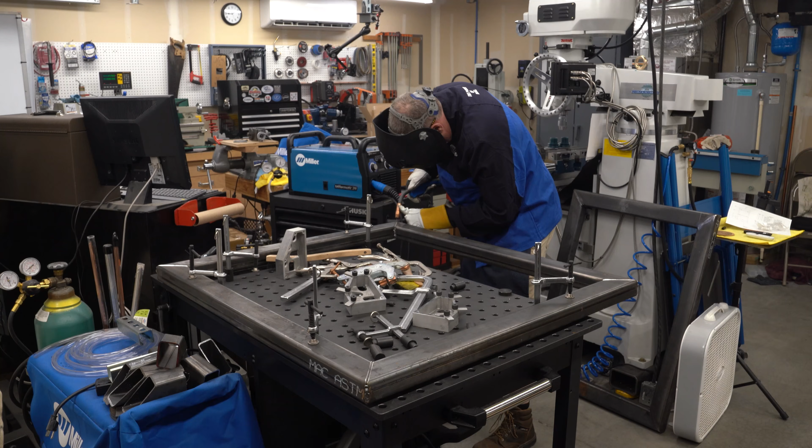Today we're doing everybody's favorite pastime, watching someone weld on the internet and telling them everything they did wrong. Though in my case, the criticism is well deserved.

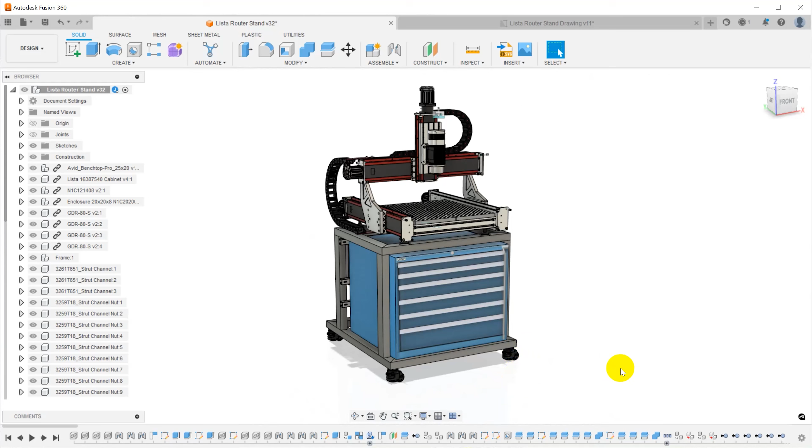This is the design for the router stand that I think I showed in a video almost a year ago, and the reason for that delay is this lista cabinet that is built into it. I ordered this from MSC and they quoted me 3 weeks lead time. 3 weeks became 6 months. One thing led to another, and here we are almost a year later, but we are back on the project

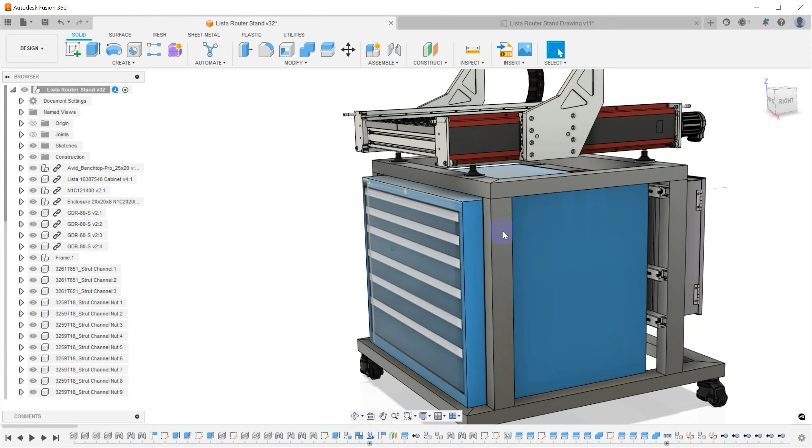today. This cabinet is a full depth lista cabinet, and it should provide plenty of storage for tooling and fixtures and anything else that I need for the router.

And then it's wrapped in a framework made from 2 by 3 inch rectangular steel tube. I'm using 1/8 inch wall tube just because it's easier to weld than the thinner wall stuff, though thinner tube would probably be sufficient. The extra weight will probably help with vibration though.

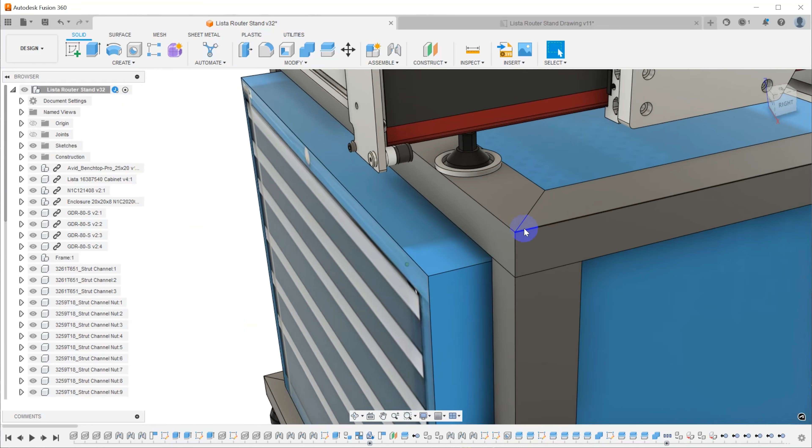I've got some rings that I'll weld onto the top here, and this will just keep the feet of the router from walking around so that it doesn't vibrate and find its way onto the floor.

And then on the bottom, I've got a set of 4 FootMaster casters. These are rated at 500 pounds per corner, and they have a ratcheting mechanism that lowers a solid rubber foot that will lift the whole thing off the ground for stability, or it can be raised up so that it

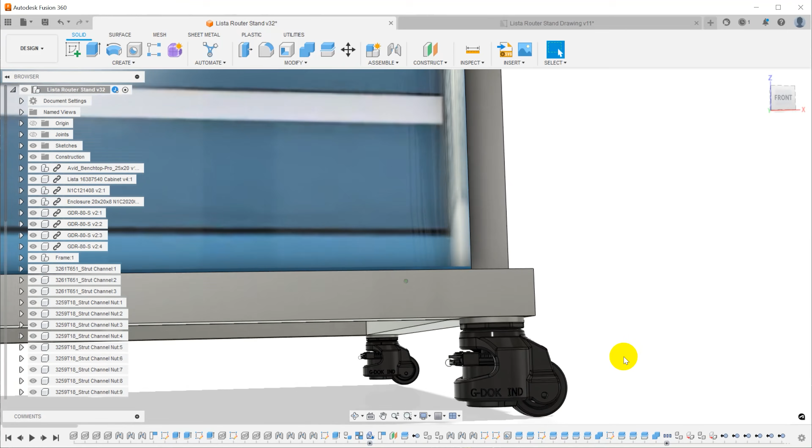can be wheeled around. And then on the back, I've got 3 pieces of strut that will allow me to attach the cabinet just so that it can't shift around and give me a place to mount the electronics boxes.

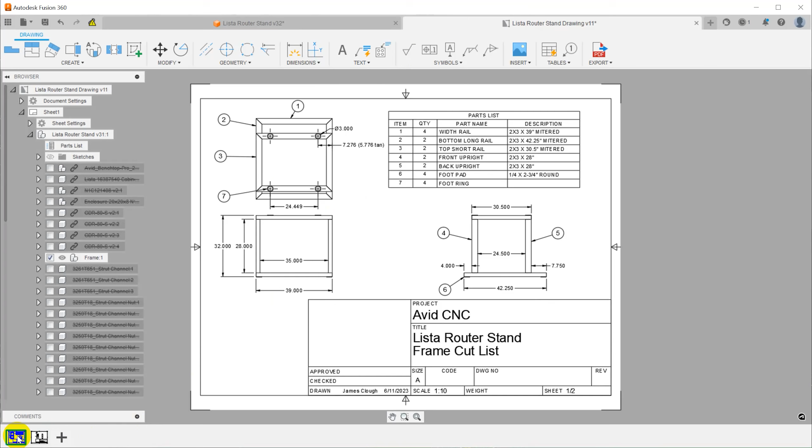But this will just give me the dimensions I need with a tape measure while I'm welding it up so I can locate the parts, and then a drilling plan for where the holes need to go to mount the strut on the back. So I think all we need to do now is go out to the shop and start cutting the tubing. This thing's not going to make itself.

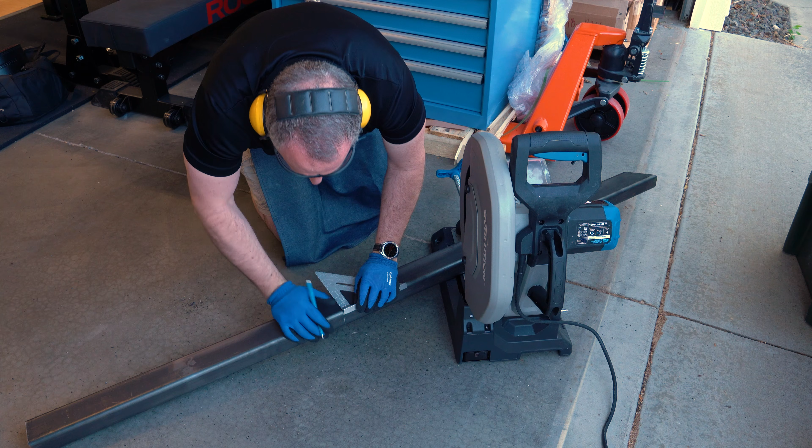To cut the tubing, I am using my Evolution Carbide cold saw, and this thing makes short work of a project like this. It cuts through this tubing really quickly and leaves a nice clean cut. I really like the cuts that it makes, but it really makes a mess.

In a previous video, I attempted to make a vacuum port for this that would catch a lot of those chips, and it caught maybe 60% of them, but it still makes a huge mess, as you can see. So I've just gone back to working with it down here on the floor. I might take another run at that someday, but for now, this is a pretty good solution. The chips don't go very far when they start this close to the floor.

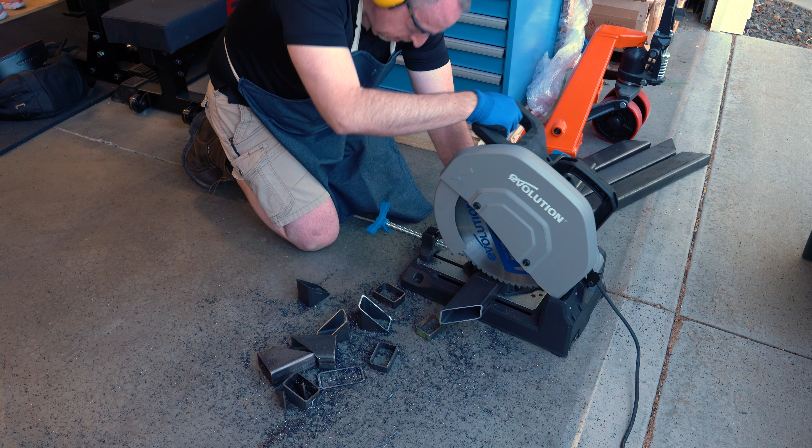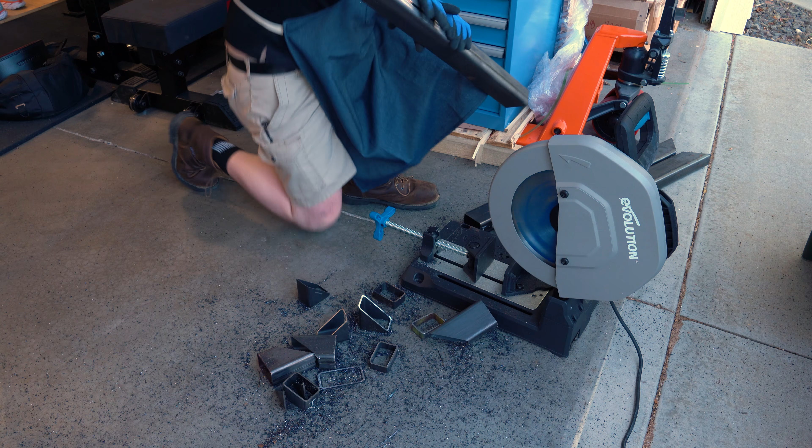The saw does have a miter fence, so I can just swing it out to 45 degrees, drop in the pin, make the cuts, move it back to 90 degrees and make my 90-degree cuts, and it makes a project like this a lot easier. I could set this stuff up on the bandsaw, but my bandsaw doesn't have a positive stop at 45 degrees and it would take a lot longer to make the cuts, so I just live with the mess.

The FootMaster casters mount to the bottom of the frame using a 1/2 inch threaded stud, and I didn't really think the 1/8 inch thick wall of the tubing was really going to be enough to retain that. So I'm cutting out some discs made out of 1/4 inch steel plate, and I'll thread those and weld them onto the bottom, and those threads should hold securely.

I'm also cutting out the rings that I need to secure the feet of the router to the top of the stand. I could have made those with a ring roller, I do have one, could roll those out of straight stock, but that seemed like an awful lot of work. As long as I have the electric fire machine out, I might as well just burn them out of the plate. I can also pull this out later and make any other brackets, weldments, or reinforcing gussets that I need for this project.

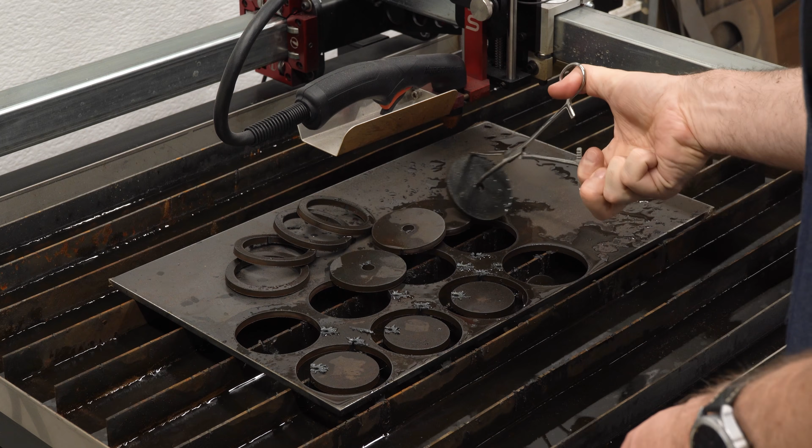The plasma cutter leaves a little bit of dross on the parts, but that is easily removed with a 60 grit ceramic belt in the belt grinder. I used to do this job with a right angle die grinder and Roloc sanding discs, but that's way more work than this, and the belt grinder ends up being a lot easier to control.

I found that if you just hold the flat side of the part with the dross against the belt and roll it back and forth on the tool rest, the sparking will die down once the dross is gone and the belt doesn't appreciably cut the surface. Then a nice quick swipe around the edge squares it up and leaves a nice clean surface for welding. Just like that, we've got 4 rings and 4 pads.

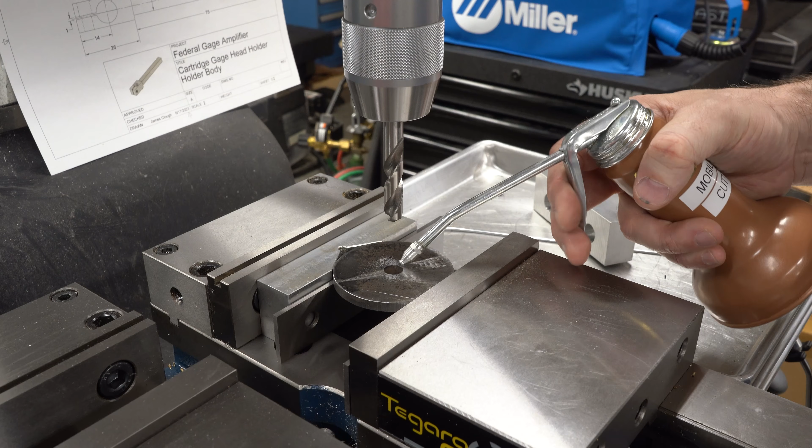Let's go cut some threads. I probably could just thread the holes in these plates directly, but the plasma cutter does leave a little bit of a taper on the wall, so I thought it would be better to come back and clean it up with a drill first, just to make sure there weren't any tight spots and I didn't end up jamming or breaking a tap. I was a little bit worried the drill would get hung up in some hard spots from the plasma cutting, but that didn't happen at all. It just cut right through it like butter.

With all the holes drilled, I just came back with a 1/2-13 tap, that's the thread that's on the FootMaster casters, and just power tapped them. That went right through like nothing too. I was again concerned there might be some hardness there from the plasma cutting, but it just didn't end up being a problem.

The easiest way to drill the holes in the back uprights is here at the mill. I have a stop here bolted to the mill table, so I can take each of the back legs, slide it down against the stop, clamp it in the dual vices, and use the DRO to locate the holes.

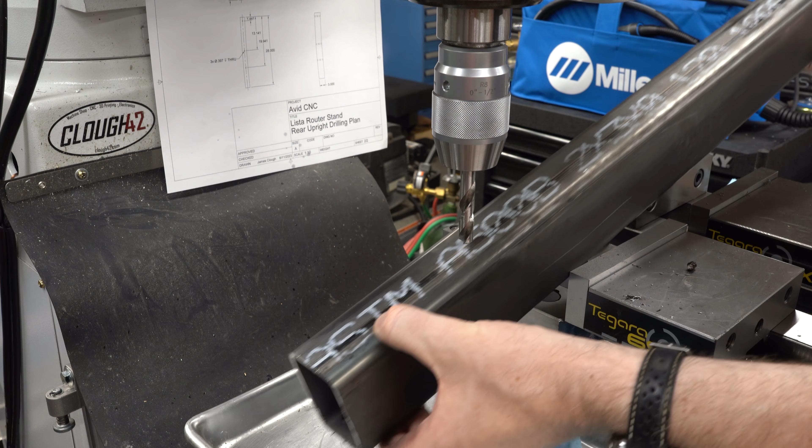I'm drilling these out as clearance holes for 3/8, that's the size of hardware I'm going to use to mount the struts to the back of the stand. So I can just drill the 3 holes in one side, clean it up, then flip the part over in the vices and drill the matching 3 holes on the other side. The stop ensures perfect registration between the 2 sides.

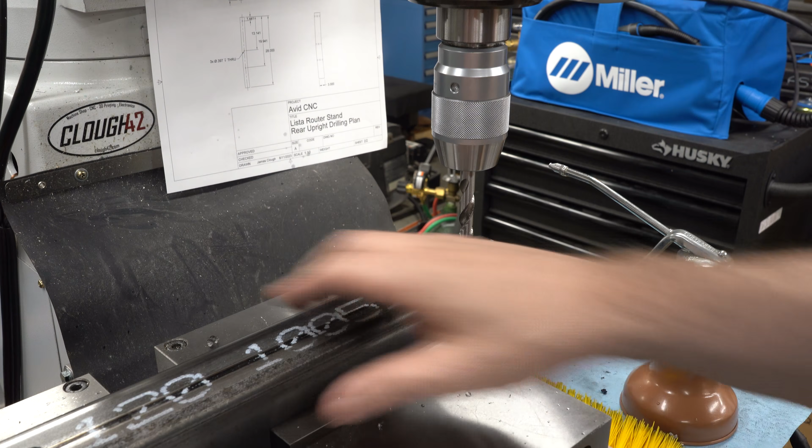Once this is done, I can put the other piece in and drill the 3 holes in each side of it. This is far easier than trying to do this with a hand drill after the frame's welded together.

Since all the parts are still loose, I might as well grind the weld bevels here on the belt grinder. I'll start by cleaning up any little burrs left on the end from the saw process, then work on the outside corner first. There's a sharp corner here, and I'm just going to grind it down flat at a 90-degree angle, and this will leave a 90-degree V on the outside corner for the weld.

Then I'll just put 45-degree weld prep on each side of the miter. This will make it possible to sink the weld all the way through and get full penetration, and also not build up too much material on the surface that I'll just have to grind off.

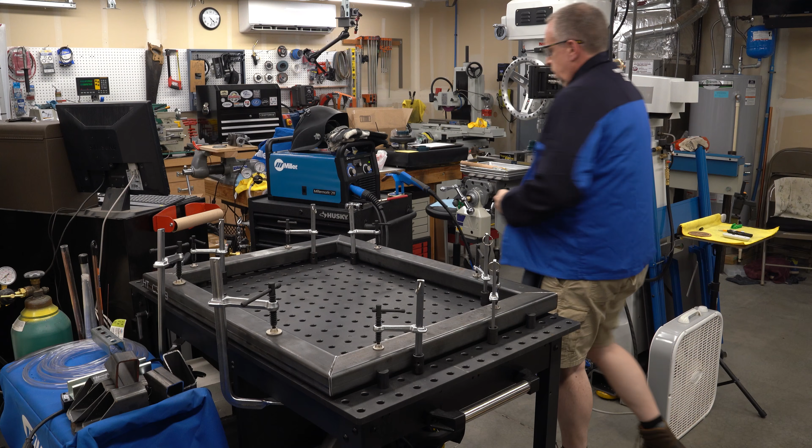This is the kind of project where a welding fixture table really shines. I have the part sitting up on top of 1/2-inch spacers just so I don't have to weld right down next to the table surface, and then I'm using pins in the table to make sure that the frame is square, or at least that one corner is square, and then I'm checking the outside dimensions to make sure that I have all of the miters butted up against each other consistently.

Ideally, I would have left a 1/16 of an inch gap, but I didn't think about that, so they are butted tight together, and the whole frame is about a 1/16 of an inch oversize, which will be fine, but it would have been better to leave a gap.

Now I'm starting the tacking with the outside corners, and I'm doing adjacent corners back to back, because the tacks on adjacent corners will tend to pull the frame out of square in opposite directions. So by working my way around in that pattern, the tacks will tend to all pull against each other and the frame will stay as square as possible.

Now with everything tacked, I'll start by welding the outside corners. I'll do this with short stitch welds or just try to be very careful with the movement. It's pretty easy to blow through on this kind of a weld, so it does take some care. And I'm doing the same thing, doing adjacent corners back to back to try to equalize the stresses. And then I'll weld the inside using the same pattern.

I did do some practice welds before I started on this just to try to get my hand in and make sure that I wasn't going to screw this up, and I got impatient with that and decided to just jump into the project. I mean, what better way to learn than to do? And it turned out okay.

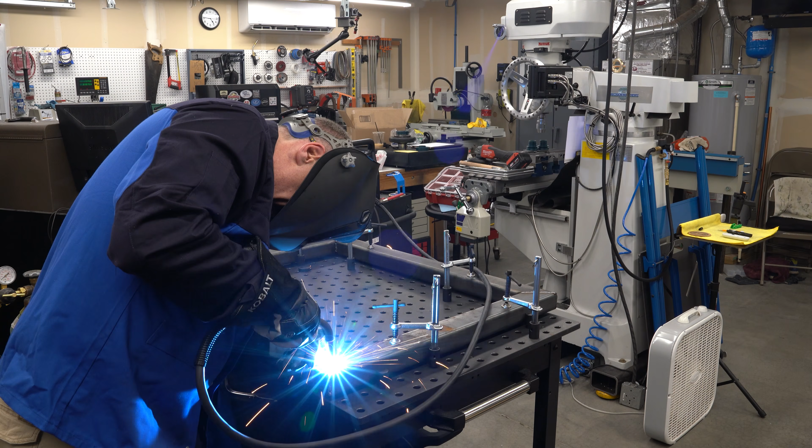My travel speed on this first frame was a little bit fast, so there are some gaps in the welds where I didn't fully fill the weld bevel, but I learned something and I'll do better on the next one.

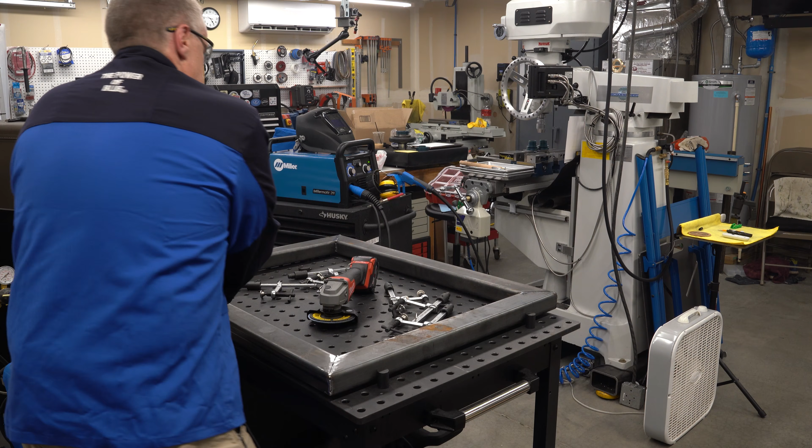Now with everything welded and unclamped, how flat is it? It's pretty flat. I'm impressed. This fixture table and the weld pattern I used did a good job.

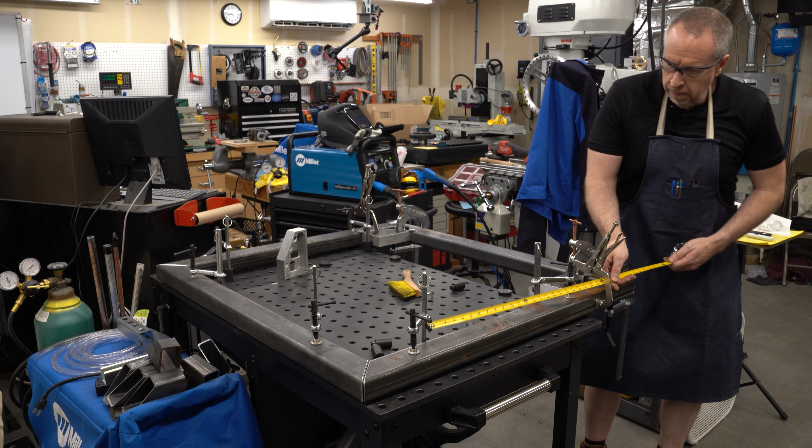Now for the second frame, it's a little too big to fit fully on the table, so I'm using a pair of Fireball Tool aluminum minion squares with the little alignment tabs, and this worked well. So I've got 3 of the sticks actually clamped to the table and the other one out in space with the minion squares, and it worked just fine. I wouldn't want to do something too much bigger than this, but at this size, it worked okay.

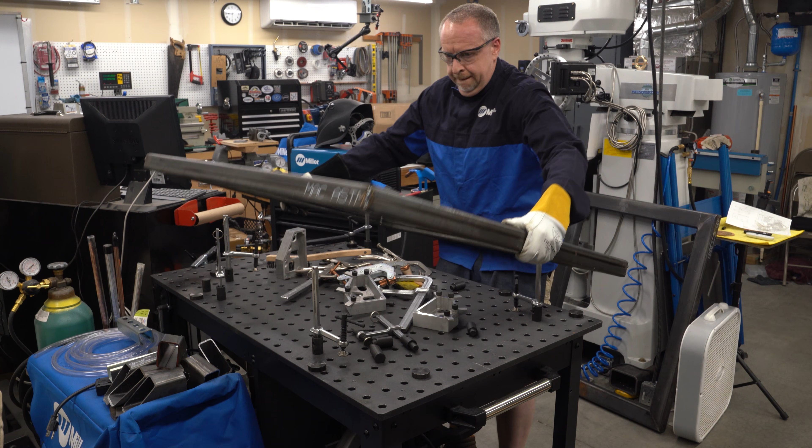All the steps for welding this out, grinding flush, flipping it over, and welding the other side are exactly the same as what you've already seen. You can see the round spacers there on the table that I'm using. And again, that's just to keep the welds up above the table to reduce the spatter that sticks to the table, but also just to avoid accidentally welding something to the table.

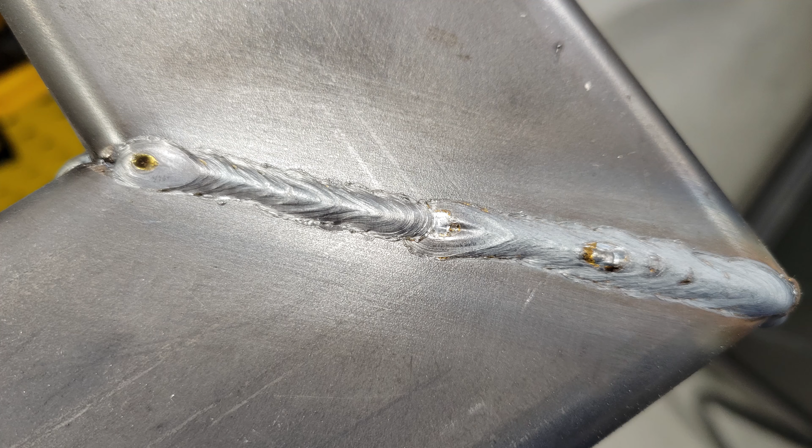Followed the same pattern, got this welded out completely, and then it was time to brush off the welds and take some photos for the gram. Some of the welds look good, like this one.

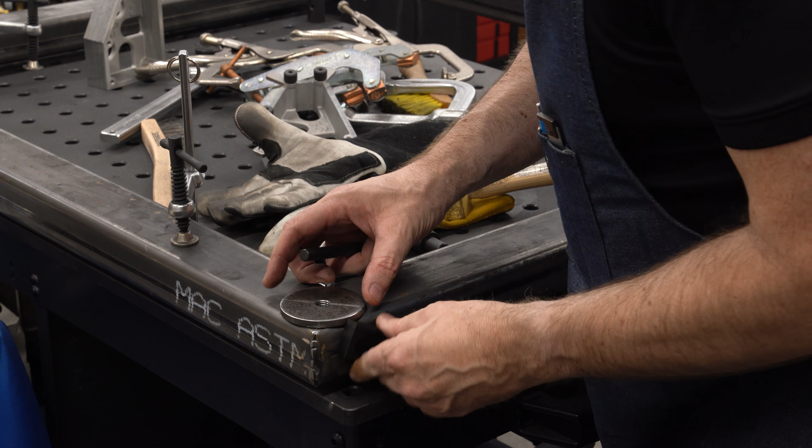Each corner of this bottom frame gets one of these round pads for a caster wheel, and I'm lining it up with the edge using a block. This is a 3-inch disc on a 3-inch tube, but it's remarkably difficult to align it by eye.

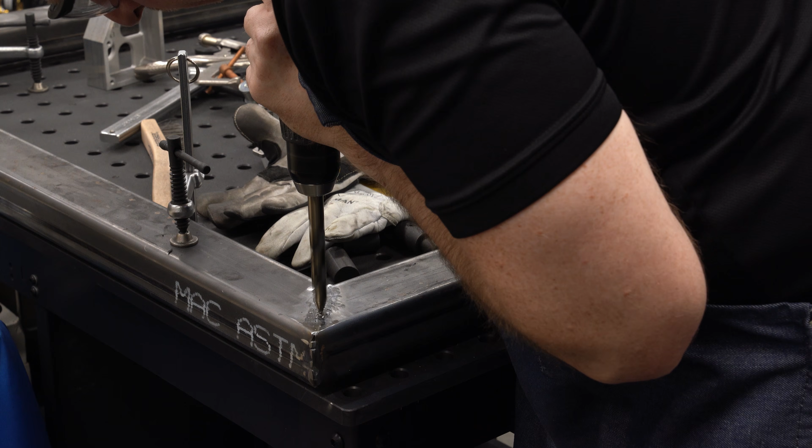I'll use a transfer punch to locate the position here. I need to drill a relief hole behind this so the screw has somewhere to go after it passes through the threads. To drill the hole, I'm using a pointed drill bit, which has almost a step drill profile on the end with a small point for centering and progressively larger diameters to efficiently cut through hollow wall tubing.

These are really ideal for fabrication jobs like this. In this case, I'm not just drilling through the tube wall but also through the weld, and we get a chance to see what the penetration is like - that looks like full penetration and a nice fill on the miter.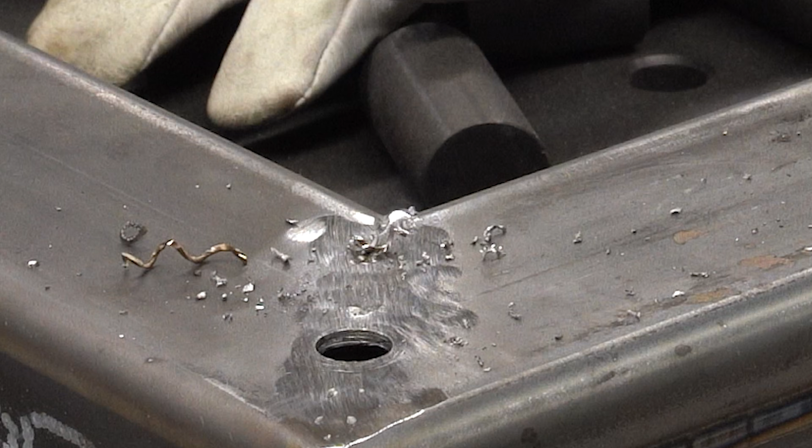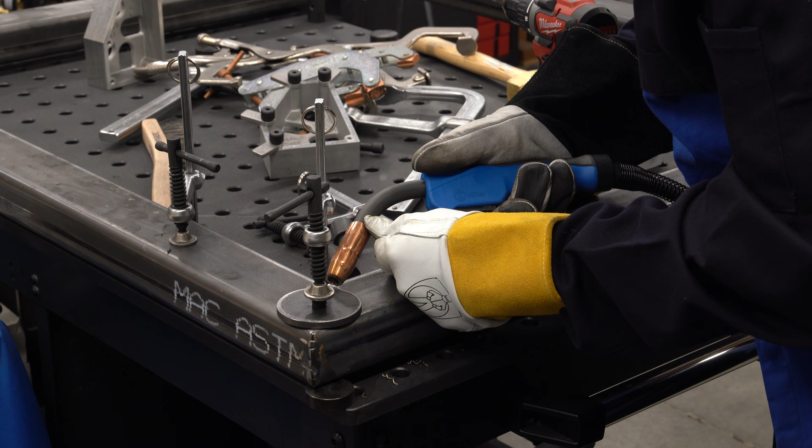I'll locate the plate for welding using the screw. Just run that through the threads into the relief hole, clamp it down, and weld this on with 4 stitch welds. I've got the welder turned up because this is 1/4-inch plate, but I don't want to blow through the 1/8-inch wall tubing, so I'm trying to focus most of the heat on the plate, and that went pretty well.

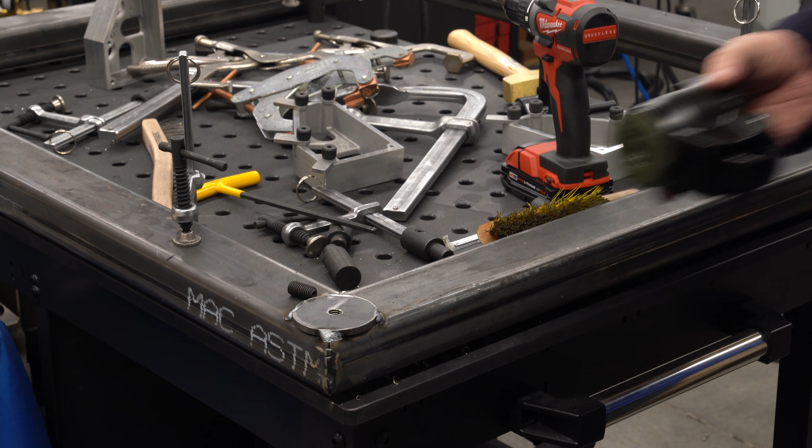Let me grab one of the feet and let's try this. This is the FootMaster caster that I'm planning on using. I'll just put the screw into the threads in the top and run this down on the plate.

It should be simple, but it's easy to test now, so it's good to do so in case I have some kind of a problem that I can fix now rather than later when it's a lot harder. That looks pretty decent. The caster has this little pop-out lever with a ratchet mechanism for running the pad down onto the floor, but for now I'm going to pull this off - it'll make it easier to work with until I actually need to set it up on the casters.

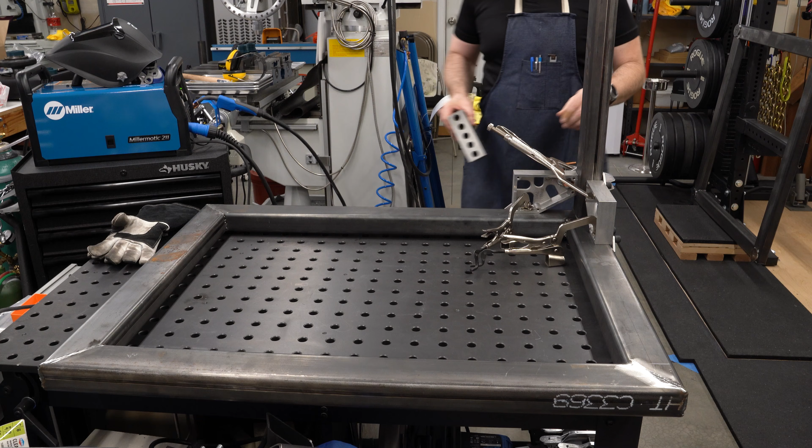Welding on the vertical members can be a little treacherous, and the fixture table unfortunately doesn't really help us here. I've fixtured up the first vertical using a pair of the minion squares, and I'm checking it with a 246 block and a framing square just to make sure it's pretty close, and then I'll tack it into place.

On a joint like this, the tacks have a lot of influence on the position of the part, and as they cool, they pull. It's pretty hard to keep something like this truly square, even with it clamped in place. Checking again with the framing square, I can see that this leg has been pulled significantly to the outside - that's enough that it's going to be a problem.

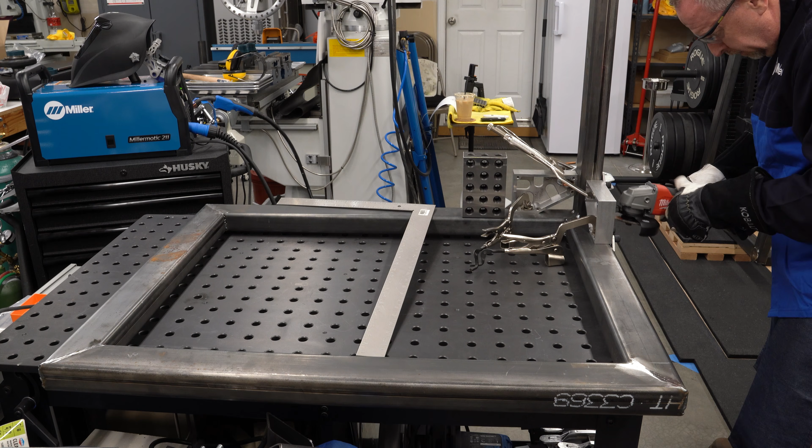So I grabbed the angle grinder and cut off that outside tack, the one that shrank and pulled the leg to that side. With the tack cut, I can just pull it and bend it back into position, then re-tack it while putting some pressure inward on the leg, and that actually worked well enough.

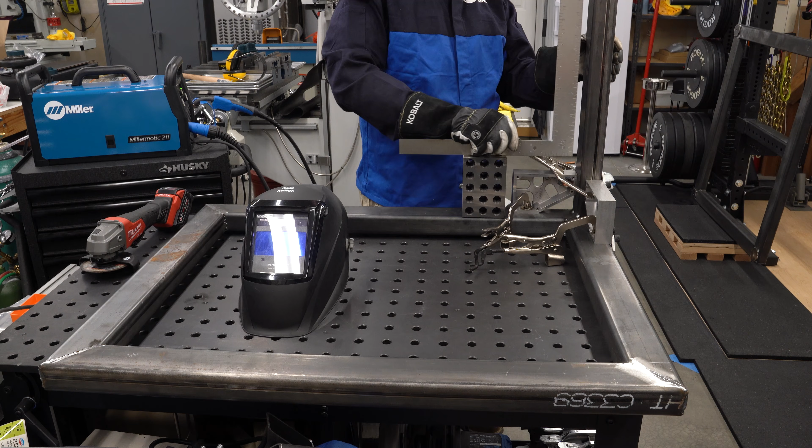It's within about a 16th of an inch of square, and I suspect all of them are going to end up splayed outward in the same direction, so it's probably going to equalize in the end and be fine.

I'll work my way around, clamping each one of these up with the minion squares and following the same procedure, trying to get it tacked into place. What I discovered is if I put a tack on the inside corner and the two diagonal corners and avoid the one on the extreme outside - just use 3 tacks - it stays a lot more square. So that's the procedure I'm going to use for the other 2 legs.

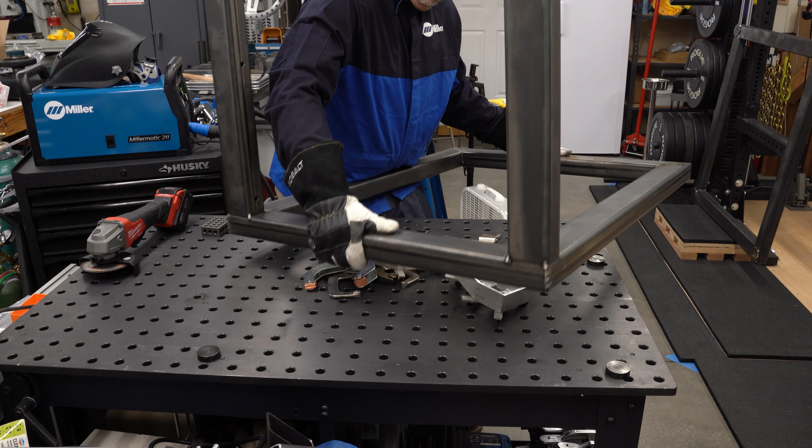Now I'm not welding any of these joints out yet, I'm just tacking them. We'll wait to weld them out until we have the entire frame tacked together.

With all 4 uprights on here, I'll set this aside, grab the base, put that up on the table, and then stand it up on top. This will be the full form of the table.

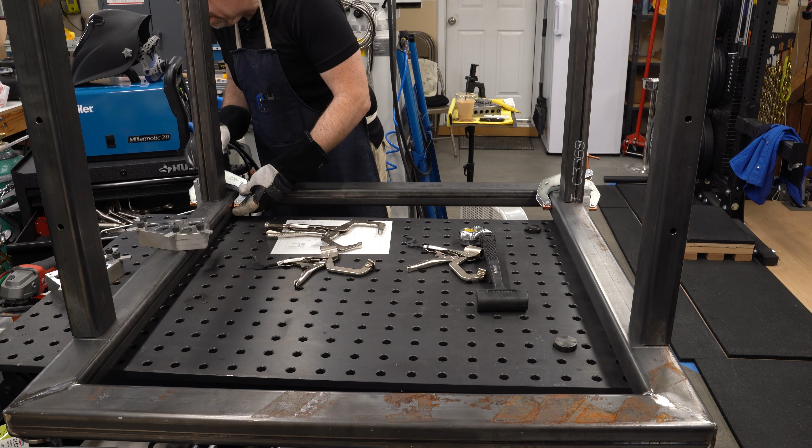You can see I've got some marks there that I'm lining the legs up with, and I'm clamping some blocks on the outside just to make sure the outside edge is flush. I'm going back and putting one tack on each leg to get it rigidly held in position. I'm checking the diagonals to make sure we came out square, and that actually worked pretty well.

Now it's just a matter of working our way around the entire frame and welding out all of the joints. I'm trying to weld opposing welds back to back, so any shrinkage that pulls it out of square will immediately be compensated by the following weld, which will try to pull it in the other direction.

This took quite a while, and I had to weld in all positions - some downhand stuff, some overhead stuff, some horizontal on vertical walls - and it all actually went pretty well. I learned a lot through this process. The next one of these I build will be better, but this one is going to be perfectly serviceable.

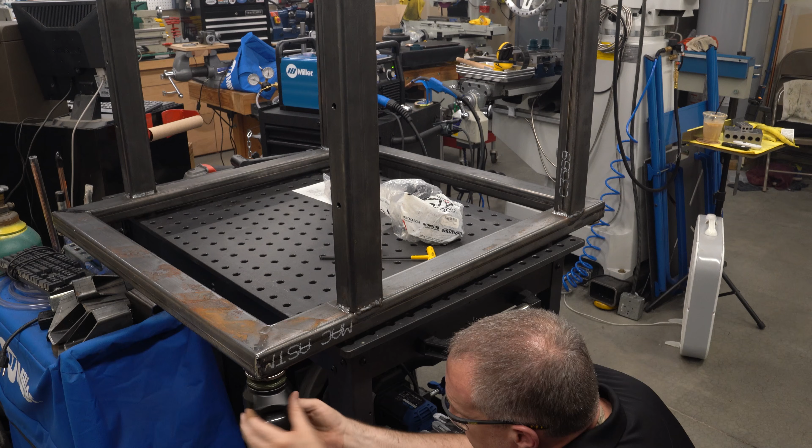With the frame all welded out, I will put the casters on it, and it's time to get this thing down on the ground. Of course, none of my pliers would actually fit into the narrow gap there, so I had to use the chain wrench to tighten them down, but it worked.

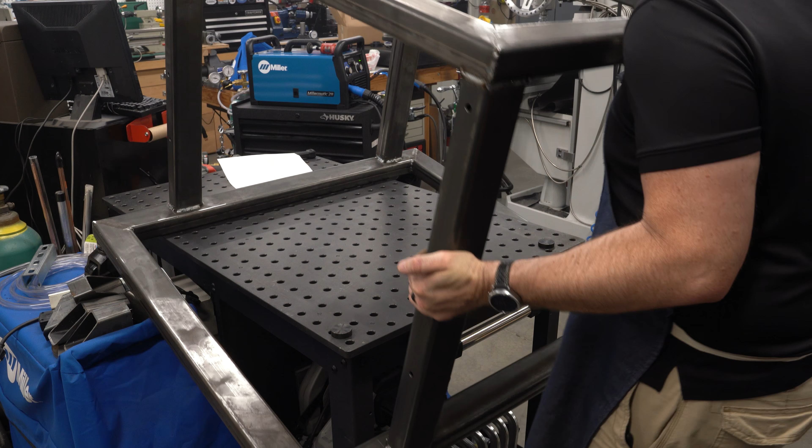All up, this thing weighs about 150 pounds, so it's not too bad to get down off of the bench. I did do that calculation before I welded it all together. Get this out of the way, move the welding table, and set it on its casters.

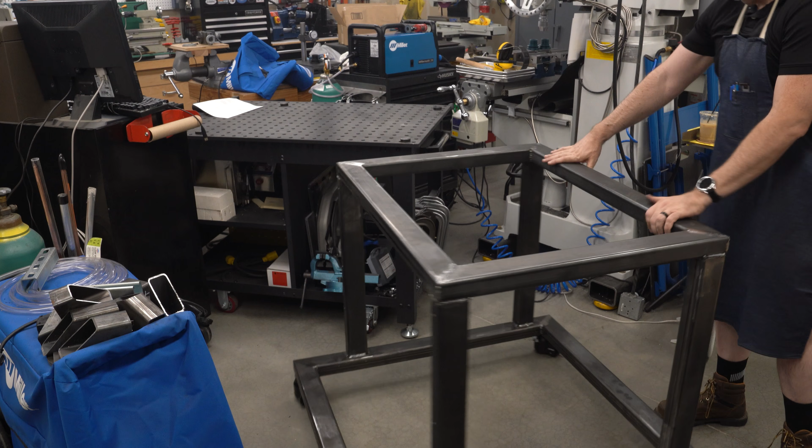Of course, my garage floor isn't even close to flat, but there it is.

To mount the strut on the back, I'm using these 3/8 nuts. These just drop in and twist into position, and then they have these little plastic tabs that push down and keep the nut from rotating. I've always used the ones with springs on them, but they're really cumbersome and difficult to slide around, and these are much easier, and they actually ended up being cheaper.

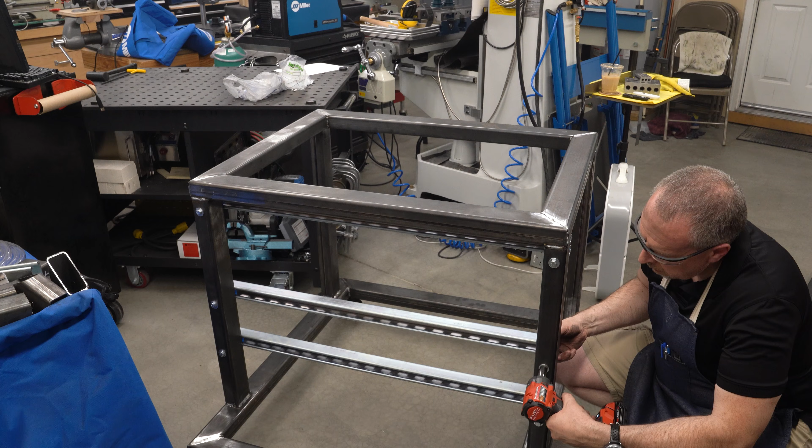So with those nuts in there, we'll just run some bolts through the holes we drilled earlier, mount the struts in place. The last thing we need to do is put these rings on top.

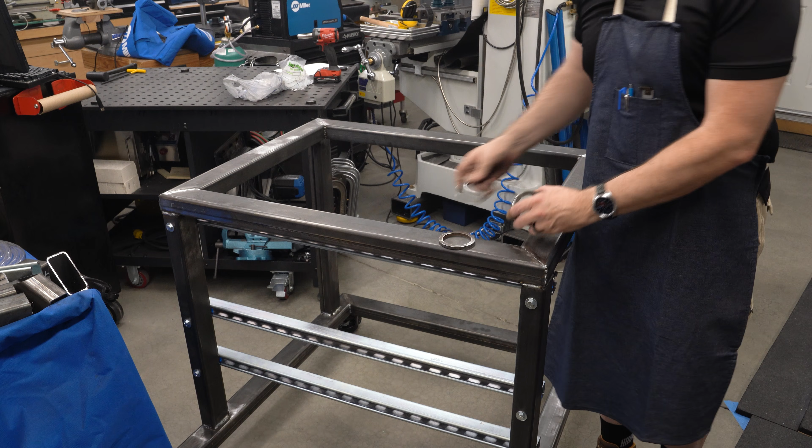I think I know where they're going to go, but just to be sure, I'm going to tack them lightly. We're using the Matt Wetzel no-look tack technique. Just line the torch up, close your eyes, look away, and squeeze the trigger. Note that I am wearing a glove for safety.

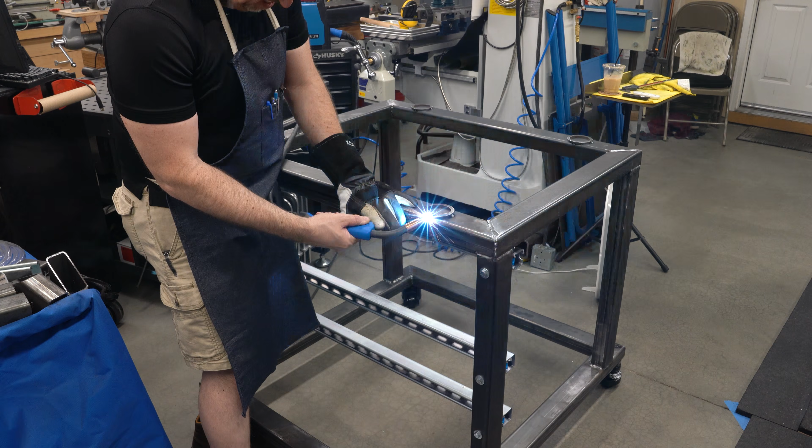Get all 4 of these tacked on, and then we'll go around and put 2 more tacks on the sides just to make sure those are nice and secure.

To load the cabinet into the frame, I will start by setting 2 of these feet down on the ground so that it won't move around on me.

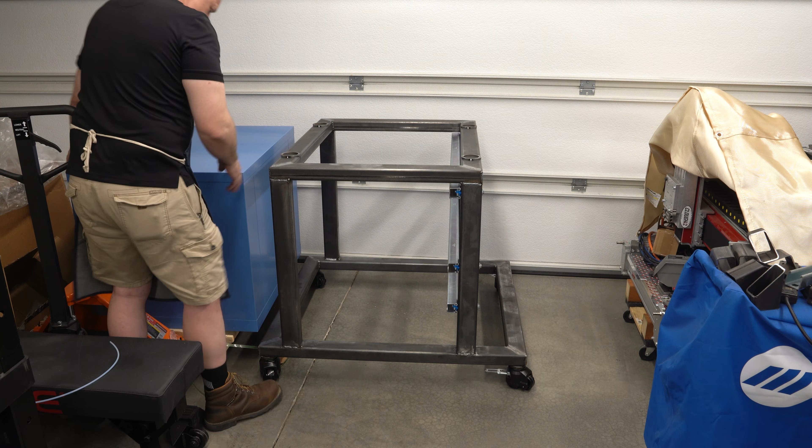Now, I thought of some really clever ways to do this with the pallet jack and cribbing to avoid manual labor here, but I didn't think about those things until after I was done. So you're going to get to watch me do it the hard way.

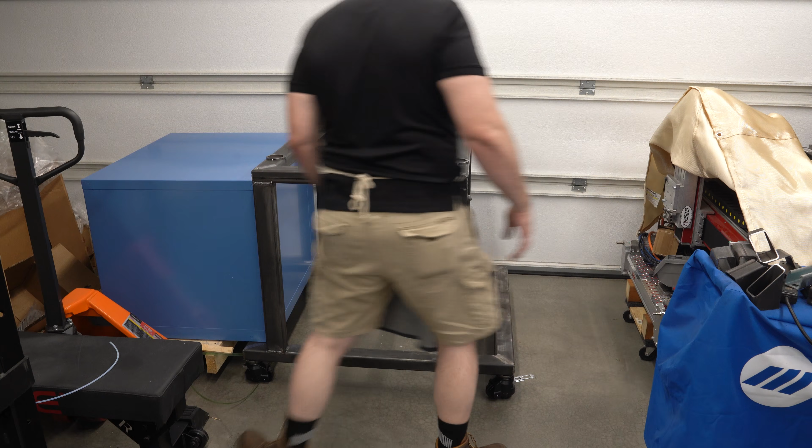I'll just raise up the pallet on the jack here, get it to the right level, and slide this in. It's a little bit too high, so I'll adjust it. Then it's just a matter of forcing it in. It fits - there's about 1/4 of an inch of clearance on every side. It's just a matter of convincing it to go in.

Like I said, I thought of some clever ways to do this after I did it the hard way. Lift those feet so we can roll it around.

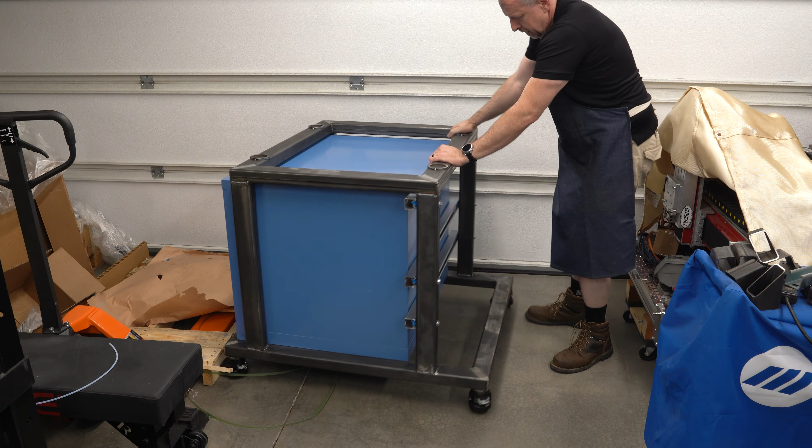This is where the electronics will mount, and the front is where all of the things go, in the drawers. It's actually a pretty good fit. I like this.

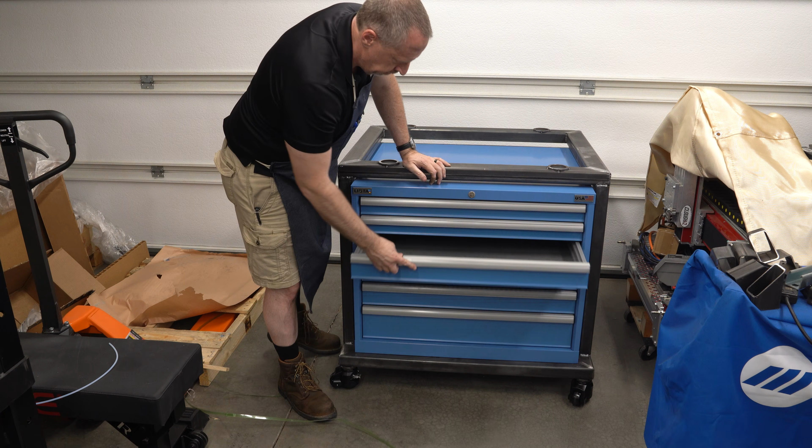I do want to actually anchor the cabinet into the frame just to keep it from moving around, so I'm going to put a couple of rivet nuts in the back here with some 1/4 inch fasteners.

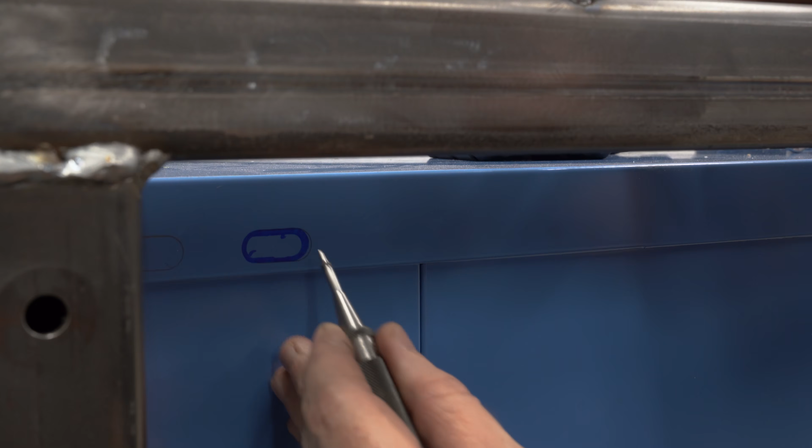I'll just mark where those need to go, move the strut out of the way, and then drill some holes to put in the fasteners. Just mark the location and drill through.

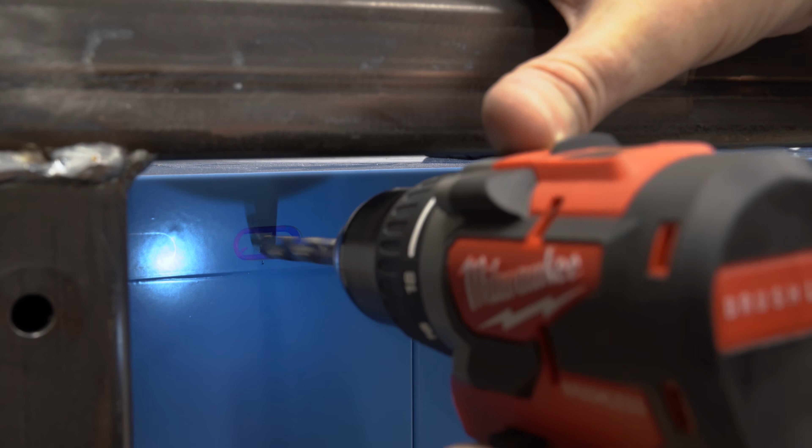There's 2 or 3 layers of sheet metal here, and I'm just using the same split point drill bits for this. Of course, I'm doing it with my left hand and trying to work around the camera, so I got it in the wrong spot, and I'm trying to angle the drill to get it into the correct position, and this did not go well.

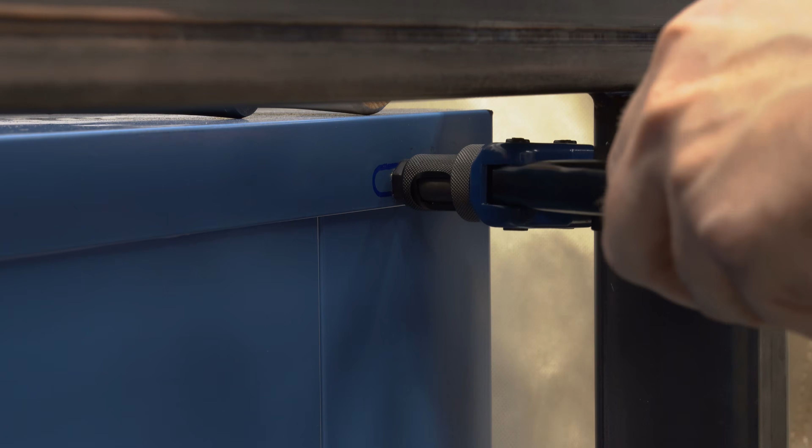Just assume I came back with a file and a punch and cleaned that up, and this is the hole on the other side. Behold, I'm using my right hand, and it went in sort of straight. So I'll just put in a rivet nut using the insertion tool here, squeeze to expand it, and then thread the tool out.

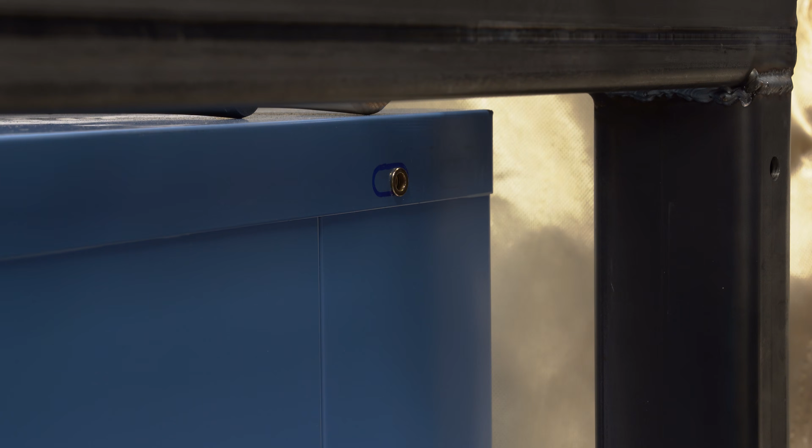Now with 2 rivet nuts in place, I can just put the strut back in, and I'm using 1/4-20 fasteners with a large fender washer. I'll just tighten these down, and it should draw the cabinet back. It doesn't really have to hold any weight, it's just to keep it from moving around. And once this thing is loaded with tools, it's really not going to slide around anyway.

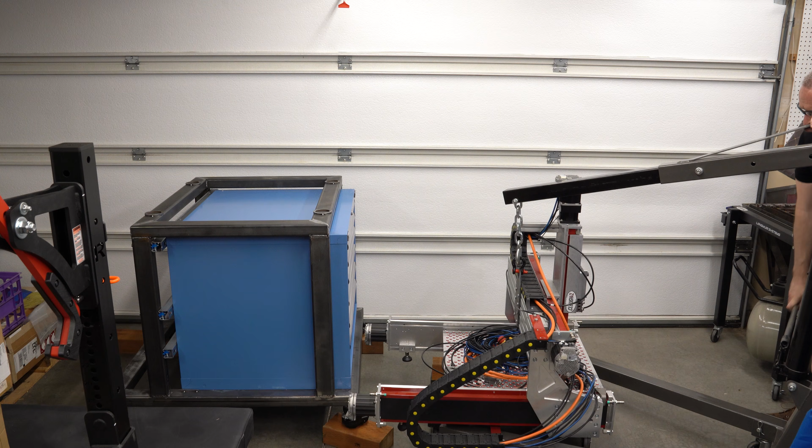And that's that. After a year of sitting on my floor, it is finally time for this router to go into its new home on top of this stand.

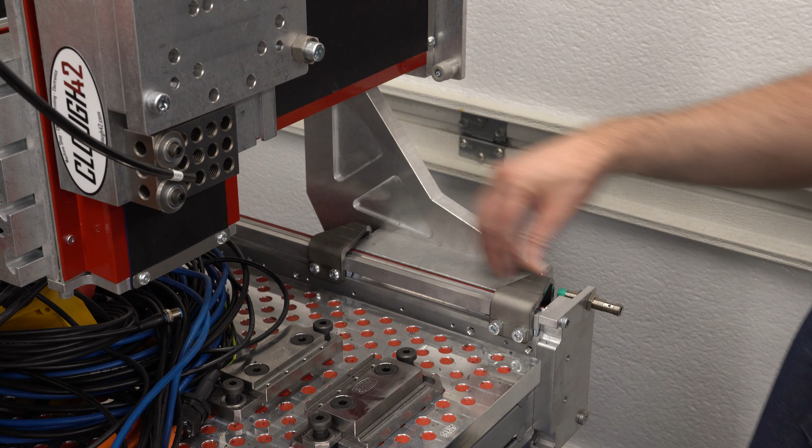Now there normally isn't a good way to lift this Avid router, so I had to make some tools to immobilize the gantry. These are just laser cut from 1/4-inch steel plate and bent, and then anchored with a couple of screws. You've seen these before because I 3D printed some of these and used them in my 3D printer test videos. But in this case, they're steel, and they're just anchored in here with a couple of channel nuts, and there's 4 of them to keep the gantry from moving.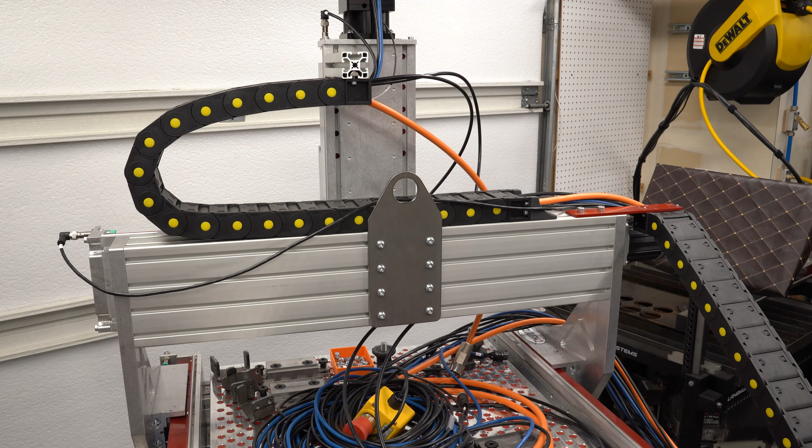Then to actually do the lifting, I've got another 1/4-inch laser cut plate that just mounts with 8 more nuts and 8 more screws to the back of the gantry and gives me a good solid place to lift. You wouldn't want to do this without immobilizing the gantry first with the anchors, but I just moved the carriage around until I found the balance point, locked it in place, and that's how I lifted it off of the table where I built it and onto the stand.

I don't have anybody here to help me, so I'm just going to move slowly and carefully 1 step at a time and stay out from under the load. I've been thinking about this for about a year, so I've thought through all of these steps, and I'm pretty sure this is going to work.

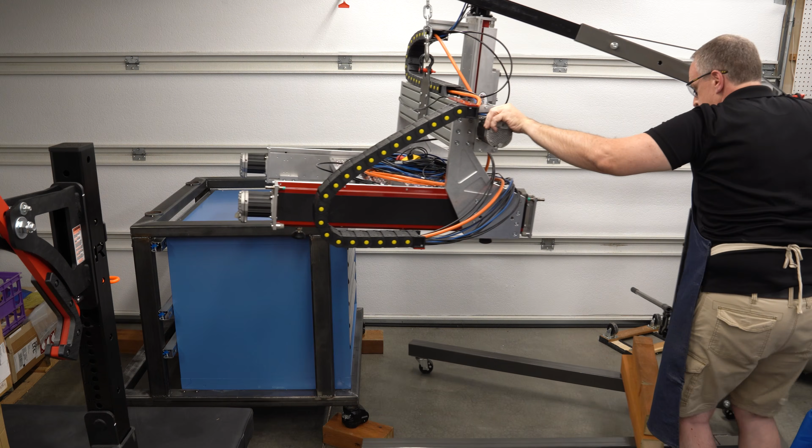You can see I have the stand up on blocks. That's to provide additional clearance for the extended legs of the engine hoist so they can slide underneath. And I should be able to get this in place and reach where it needs to go.

Now I'm going to lower it just a little bit, just enough that I can get 1 foot into its ring. It'll stay. I can lower it a little bit more, and then work another foot into its ring.

And then I'll lower it some more so most of the weight is on the stand, but not all of it. And then I can shift it into its final position, get the feet centered where they need to go. And then I can take the rest of the pressure off. And we're done.

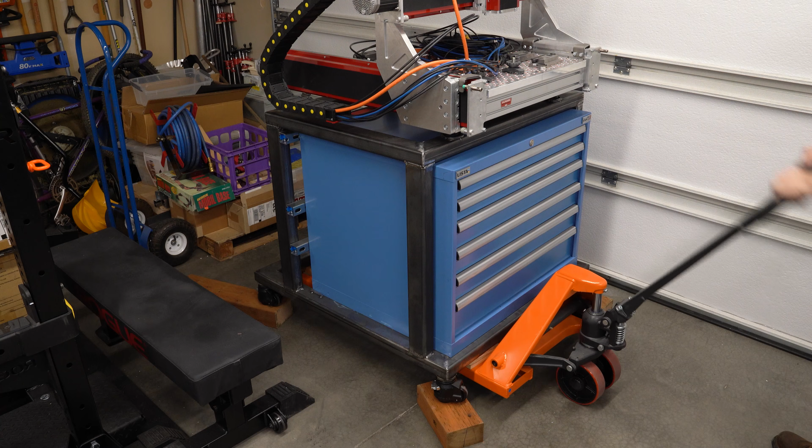Of course, because my shop is small, I need to fold this up and get it out of the way so I have room to work. And then I can grab the pallet jack, lift this, and get it off of the blocks.

Fabrication is always a lot more work than I expect, and there's more to come, but I'm really happy to be making some progress on this project again. And my horrible welding was starting to look a lot less horrible by the end there. It's amazing what a little practice will do, and a good welder.